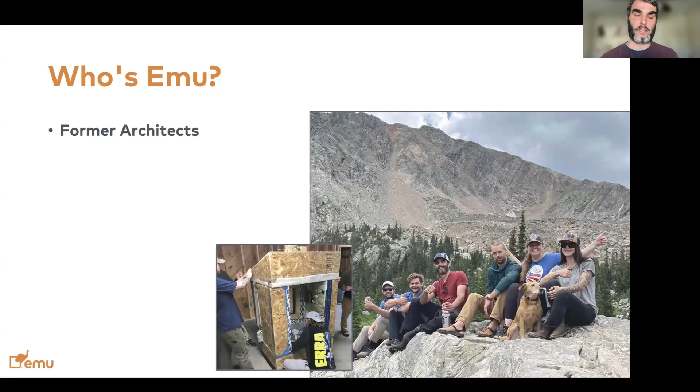So who's Emu? We were architects. Emu was literally founded by Mariana Pickering and I in 2009 as an architectural practice. Over the years, we evolved to providing mostly training. We saw a great opportunity for faster and more impactful change in the market by educating people, more so than working on individual projects one at a time.

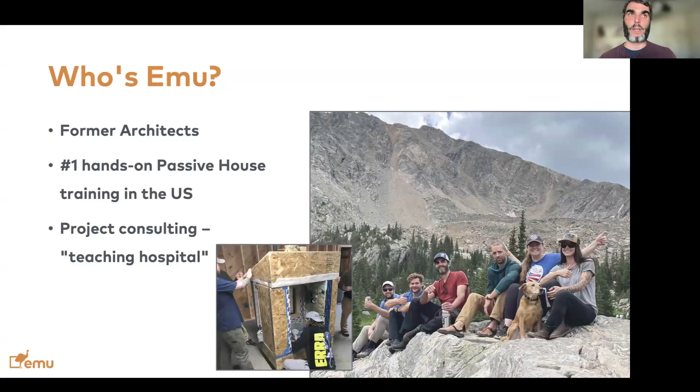We have developed a hands-on workshop that we take around the country. We were in Brooklyn last week, we are going to be in Boston next week. We can talk later about upcoming dates, but it is a lot of what we do. We also do some consulting as a way to keep our curriculum relevant. We see ourselves as a teaching hospital - actual projects are a way for us to be familiar with new products, new challenges, different climate zones, different types of projects. So it's a way that keeps our teaching alive and current.

So what Emu does is actually a lot of training. About two-thirds of what we do is training, and the remaining third is consulting. The training is mostly online. We have the in-person boot camp that is probably what is most visible on social media - if you follow us on Instagram or YouTube, you see a lot of that. But that training is also available online for the course part. Consulting, we do some of that, but it's really to help alumni on their first projects and to keep the curriculum relevant, as I mentioned.

Now, this is who Emu is. I would like you to try and put in the chat who you are. It's always good for me to have an understanding about who I'm talking with, so that when we have the conversation later, it's going to be more fun and more defined.

So please put in the chat - if you are an architect or designer, please type 1. If you are a builder or contractor, please type 2. Type 3 if you work in construction with some specialty, for example if you're an engineer, an HVAC installer, or if you rep or install windows, things like that. Type 4 if you work in permitting, inspections, or testing - we don't get many of those, so I hope we have some in the crowd today.

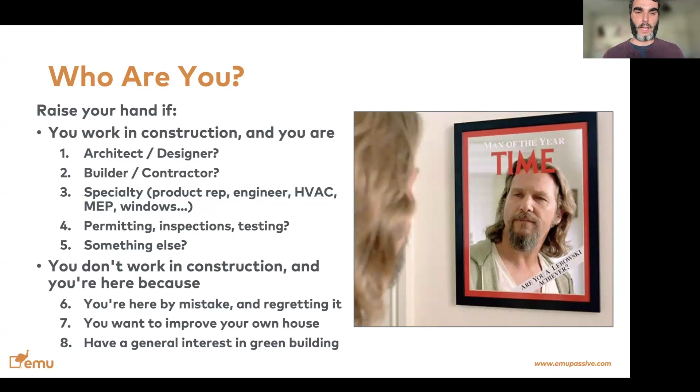Or something else, but you're still a professional. And if you're not a professional working in construction, then if you're here by mistake and regretting it, type 6 - you're still in time to leave. If you just want to improve your own house, type 7. Or if you're just interested in green building, please type 8. This is kind of helpful to get a sense of what audience we have today. Please type your number as you go in.

Now, why do we care about buildings? This is something that when we teach our builders and our architects, we always try to go back to the why. Because if we understand the why, then we have a good sense of how to move forward.

A lot of people that come and take our training or that we help with their projects via consulting, they don't necessarily want to certify the buildings. They want to build better and use passive house science to get there, to have more resilient buildings, healthier buildings with higher comfort and higher indoor air quality, as well as goals to get to net zero and significantly reduce their energy impact on the planet. So that is why they come to us, but they really don't always come to us just to get a plaque or certification.

So we spend a lot of time inside buildings. Do you know how long we spend inside our buildings? Can you please type in the chat what percentage of time we spend inside buildings?

Let me see the chat. This is intended to be a little bit interactive. Oh, 90%, 90%, okay good. A lot of you have done your study. Very good.

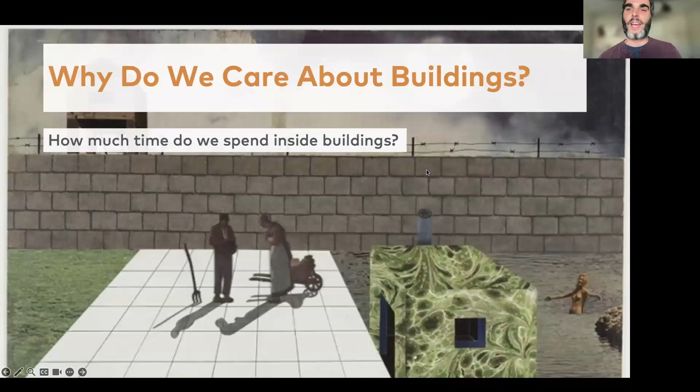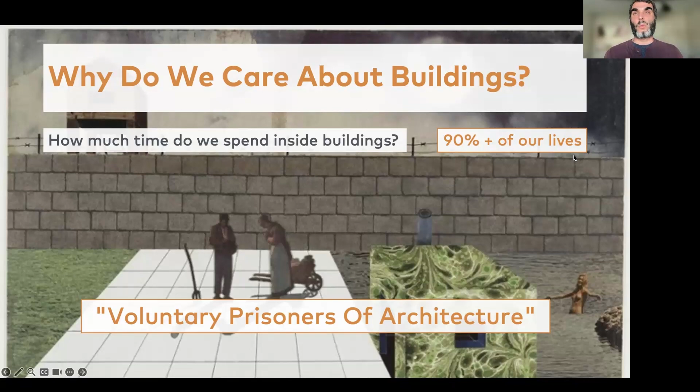There's an architect from the Netherlands, Rem Koolhaas, who had this concept of voluntary prisoners of architecture. We people, there is no law that forces us to be inside our homes. Yes, there are people in jail, but that's different. Most of us decide to be inside the building because we get shelter, we get protection, but we are voluntarily doing so. There's no requirement for us to do that. So these are some examples of buildings.

This is a brewery in Colorado. That is my beer glass. And I was so uncomfortable, it was so cold that I only had one beer instead of a couple. And they literally lost business because the place was so uncomfortable.

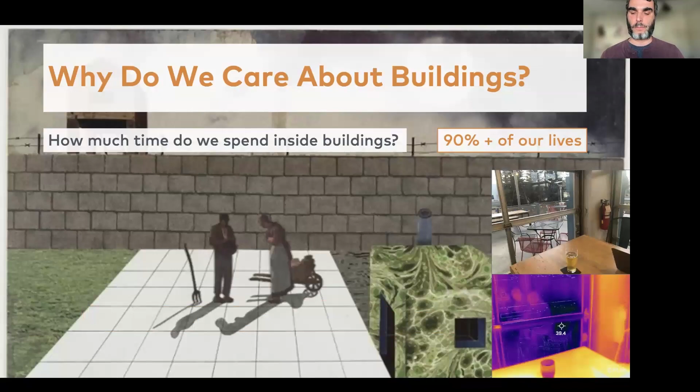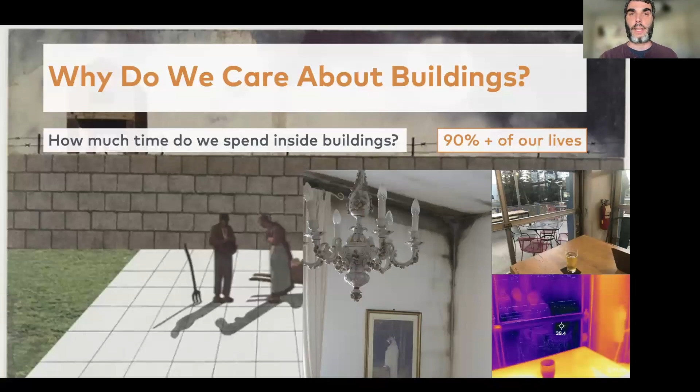And this is one of the risks that we face in pushing the envelope without really knowing what we're doing for the building science. This on the left-hand side kind of ties to the conversation we were having before the presentation started about monitoring CO2 and indoor air quality.

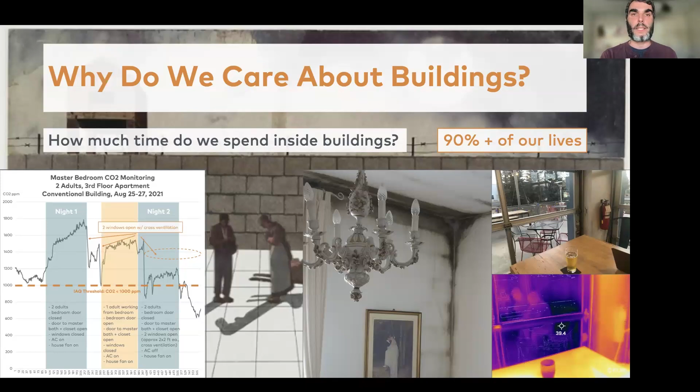This is an apartment I used to live in in Colorado, a building that is less than 10 years old and has no continuous ventilation. In the shoulder seasons, in the spring - this is actually in the summertime - I was basically fighting the need for fresh air and to keep my CO2 low with the intention to be comfortable. It was basically impossible to do because the building was not set up to have indoor air quality. So that is a building that complies with the latest energy code, but does not have a way to control indoor air quality, which is very important.

So another question for you all, please type in the chat. This is something that I ask all the time. If you've seen me present in the past, you probably know the answer to this. How long does a family stay in a house they just moved into before they move out again?

I see a 6, I see a 10, 5 to 7, 4, 13, 13, 7, 7. So this is awesome, we have all numbers in the spectrum. We have 7, we have 25, we have 5. Years are just numbers, I heard once, which is fun, but it was a different context.

How long have you lived in the house you live in right now? 10, 32. Okay, pretty high numbers there.

So this is very important because as we make recommendations to our clients, as we make decisions to invest in a building that is built better and is more resilient, we're going to be asked about what is the return on investment of this greater investment, what is the energy savings and all of that.

And if we don't have the frame of reference for the time clear, then we are giving ill advice to our clients. The national statistic, which has nothing to do with passive house, provided by NAHB, the National Association of Home Builders, is that on average families stay in homes for 13 years before they move out again. And this statistic is over 10 years old. So for the past 10 years continuously it has been 13 years. And the number is increasing, so people are staying longer. There was COVID, there are higher interest rates, it becomes a lot more expensive to build. So people spend a lot more time in buildings than we may believe.

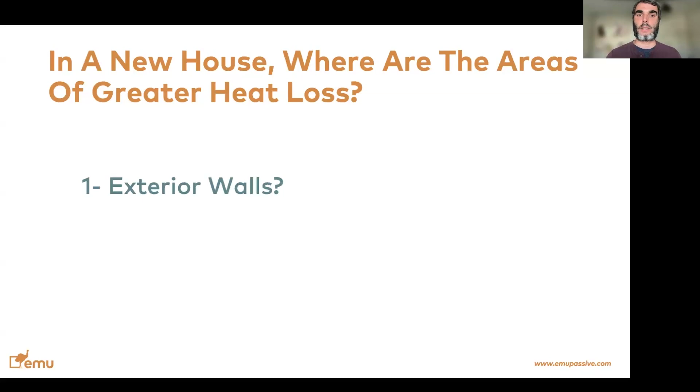So looking at how we can make a building more energy efficient, in a brand new house built to the latest energy code, where are the areas of the greatest heat loss? Is it the exterior walls? Is it the ceiling or the roof? The air leakage? Is it the windows, exterior doors, the doggy door? Or is it the slab, or losses through the ground? Please type in the numbers that you believe that to be.

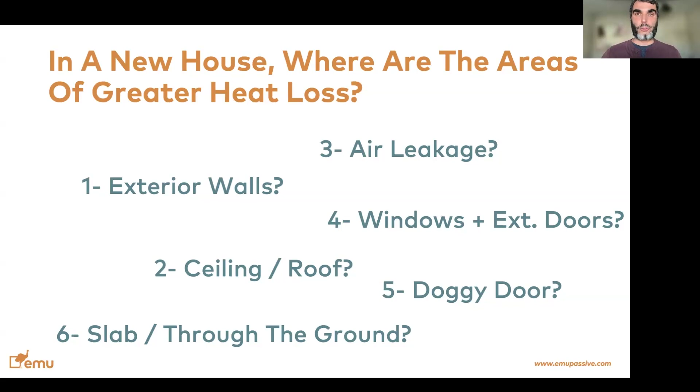I see air leakage, I see slab, I see a lot of air leakage, I see a lot of windows. Air leakage, excellent. And I didn't know that, so I included this in part of a study that we published last year, because we ourselves, we call EMU, we curate our own curriculum, and people were asking, and clearly this changes depending on different climate zones and different types of buildings, if it is a retrofit, if it is a commercial building and whatnot. But I had no idea.

So this is part of this study that we published last year with 50 different projects, single family home, new construction, where we compared different building standards. And we found that this was the typical breakdown of the heat losses over those projects. Now, those projects were intentionally selected to be in different climate zones. They are all new construction. And if we apply the 2021 IECC energy code, then this is the breakdown that we will find on average in those projects.

In other words, number one, windows and exterior doors. That does not include air leaks. Air leaks are lumped up in the air leaks in the blue here. Number two is exterior walls. Number three is heat losses through the slab or through the walls, through ground, to the outside air. And only number four from the top is the air leaks that count for the heat losses in these new buildings. Yeah, I see that it's very hard to read.

I'm sorry about that. Maybe I can provide the PDFs after this presentation. But long story short, on average, you can expect the greatest area of heat losses in a new house to be windows. The second one, the exterior walls. And the third one to be the floor or the slab on grade, heat losses through the ground to the outside. And the air leaks is only the fourth one.

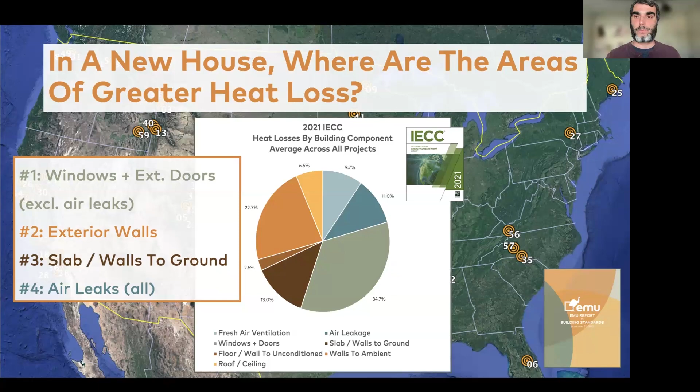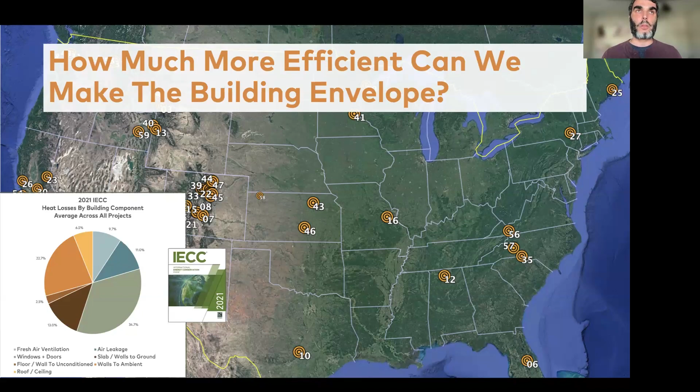So this was one of the surprises that we had as we were processing the data from these 50 different projects. Now, something that I found to be interesting is that was for the 2021 energy code. What about passive house? So we modeled, as part of this study, also for all these 50 projects, if they were to meet the PHI passive house, and this is what the breakdown would look like. So it's actually a very similar breakdown.

Windows are still the number one cause of heat losses. And the second one is still the exterior walls. And the third one is still the heat losses through the ground. So the difference is that using passive house, we significantly reduce those losses. But the kind of breakdown or the hierarchy remains kind of the same. Number one, windows. Number two, walls. Number three, losses through the ground to the outside.

And that's why we're going to have a couple of examples of that today. And the losses through air leakage is something that is very talked about. It's very present on social media because it's very important for the durability of the building, for buildings to be airtight. But in terms of the overall weight of the losses through air leakage, we're talking 10%. We're not talking 50%. I heard builders say, oh, I saw on Instagram that air leaks count for 50% of the heat losses. And that may be true for old buildings that were not retrofitted, where you have a ton of air leakage. But if you start looking at buildings that have 3 ACH or air leakage or tighter, then those losses through air leakage is just 10% or less of the total.

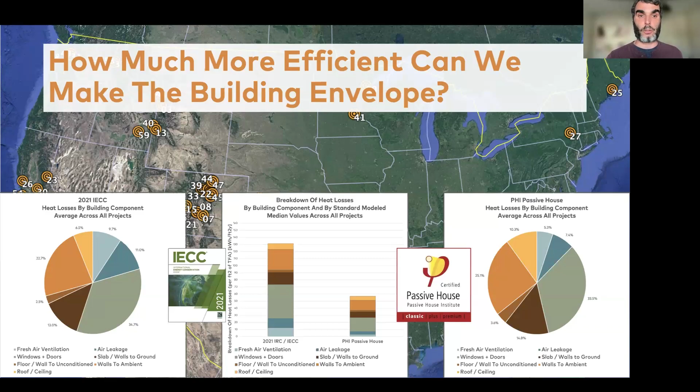So let's start talking about windows. This is the first in our lineup. And why do we care about windows? I mentioned that I was so uncomfortable at this bar in Colorado that I had to leave. And this is something that is extremely common, not just in breweries, but everywhere. In fact, there is no requirement in the regular building code to provide thermal comfort. That is something that Passive House does include as part of the certification requirements, as opposed to building code and other building codes like Energy Star or the Zero Energy Ready Homes. They don't really address thermal comfort.

Colorado was the first place I lived where I had ice forming on the inside of my window. This was during COVID, 2020-2021, and I had not much to do, so I posted a picture of this on social media, including LinkedIn. We work with a lot of window manufacturers, so I have many connections in the fenestration and window manufacturing industry. I got so much pushback because I posted this picture. To the American window and door manufacturing industry, it is accepted and considered normal to have ice forming on the inside of the window. I did not have a humidifier, it was just a cold day outside. I had ice forming on the inside of my window with no humidifier, and that is accepted as normal and standard for American-made windows. That is very sad.

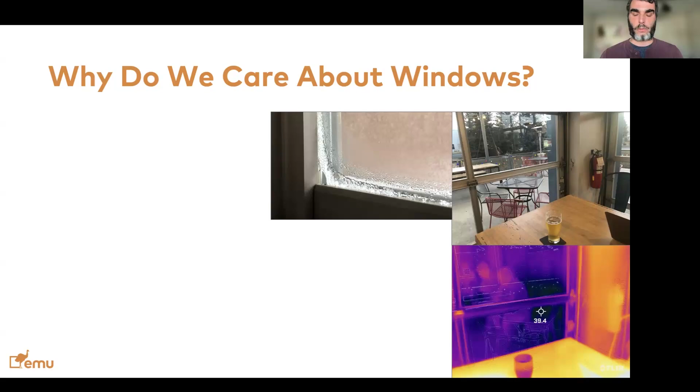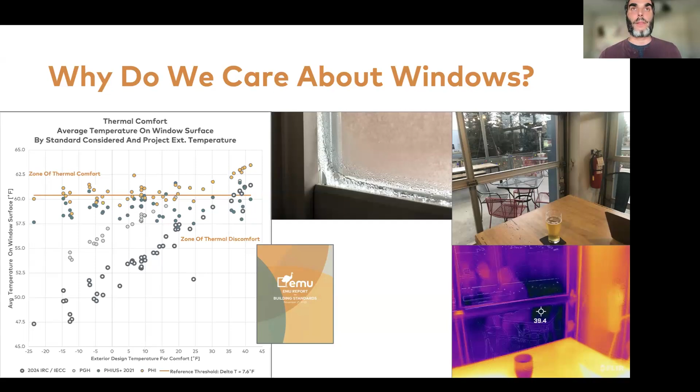Just to give you context of what is out there, this is another analysis from the same study going over 50 different projects, where each dot is one project and the color shows which building standard we were considering. There's a free download at the end of this study if you're interested. This graph shows that PHIUS and PHI follow the thermal comfort analysis, as opposed to building code, which has no relationship between the requirements and thermal comfort. We care about windows because they are cornerstones of our buildings being comfortable and free of ice, mold, and condensation. That is why we care about windows.

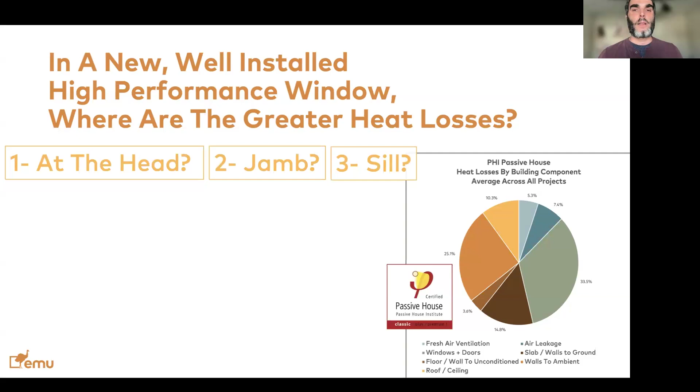Now, in a new, well-installed, high-performance window, where do you believe the greatest heat losses occur? Type in the chat - do you expect losses to be at the head, the jamb, the sill, the glass edge, the window frame, or through air leaks? New window, well installed, high performance - where do you see the greatest losses?

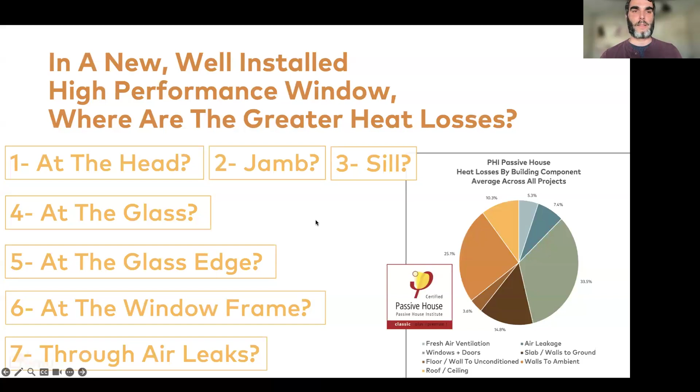I see some saying air leaks, some saying window frame. Very good, very good. Glass edge, okay cool. Thank you for participating.

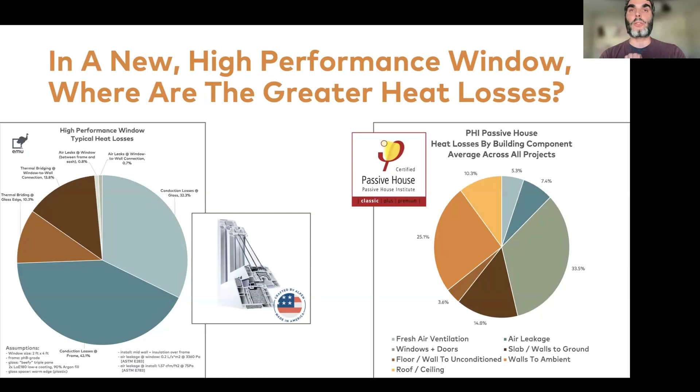Let me jump ahead a little bit. Number one is conduction losses through the window frame. Number two, in lighter blue, is losses through the glass. Number three is the thermal bridge at the window-to-wall connection - we're going to see in a second what that is. The fourth is the glass edge thermal bridge. Last come the air leaks at the connection between the sash and frame, and the window-to-wall connection. These are data we got from lab testing and field testing from Alpen.

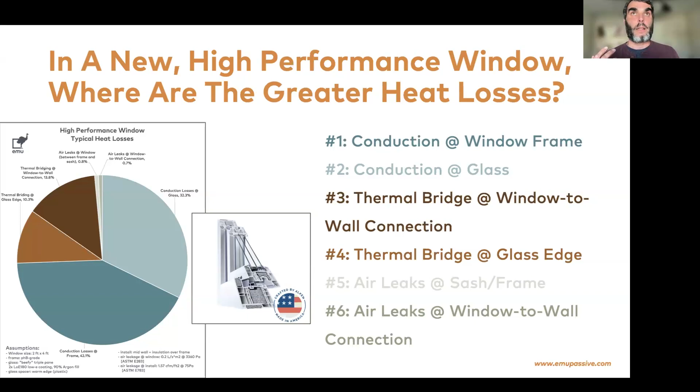A lot of builders who come to our training know that windows are going to leak at some point, but really the air leakage is a very small fraction of the losses through a window - it's like 1% or 2%. Majority of the loss, once we switch to a high performance window with triple pane, then the frame becomes extremely important.

Then there's the glass edge thermal bridge, which is number 4. Only number 5 and 6 are the air leaks between the sash and the frame of the window itself and at the installation of the window, assuming this is a well-installed window. So in the context of windows being the biggest cause of heat losses, within a window, air leaks are actually very small, assuming it's a good window that is installed well.

That's why we train builders to do that. But it's extremely important to choose a good frame and a good glass, because otherwise you may have a very well-installed but very poor window. And that will still get you uncomfortable with ice and condensation, because a lot of the losses are through conduction, not through air leaks.

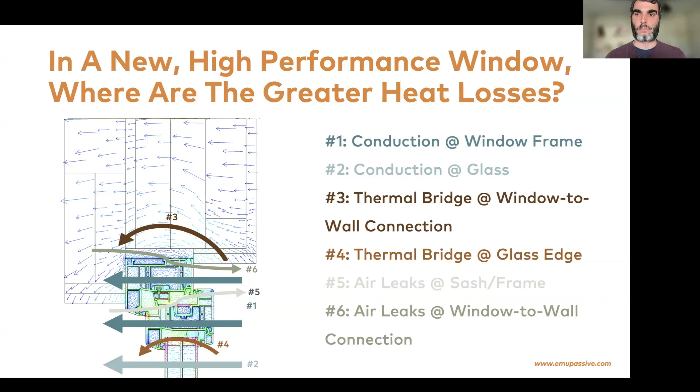The next one up, and we saw that in the pie chart for the heat losses, is heat losses through the ground. This is something that blows builders' minds when we mention it, because there is a belief that the ground is at a constant temperature, so it kind of does not matter. It is all the opposite. It does matter a lot. It is the third greatest area of heat loss in a typical new construction.

Somebody says we cannot see the new slide. Can you see the new slide now? Can you see a blank slide? Okay, cool, thank you for that.

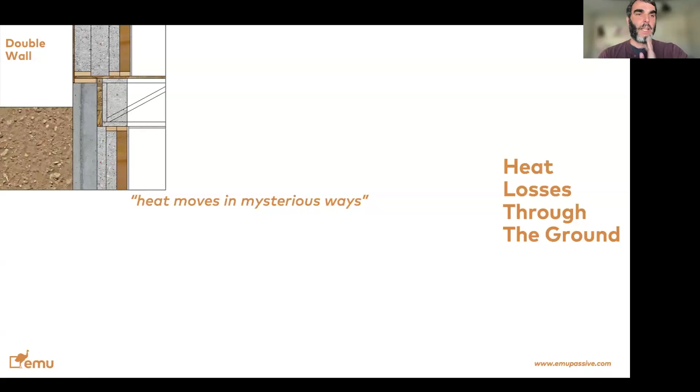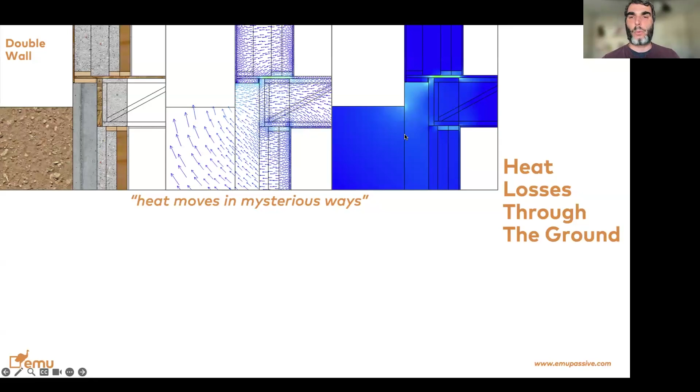So this is a typical construction detail where you have your losses. This is what the flux diagram shows, and you can see there's a lot of arrows that go from downstairs through the ground up to the outside. In this case, it's not a big deal. We have enough insulation through the floor to not cause any issues.

This is a case of a double wall, and these details vary significantly in what strategy we need to implement depending on what kind of assemblies we are trying to connect. Now, if we do the same exact detail, but with a 2x6 wall with exterior insulation, it looks like this. This is something we created for our textbook. The one above is from an actual project. We wanted to replicate the same and show some issues with the different types of assemblies.

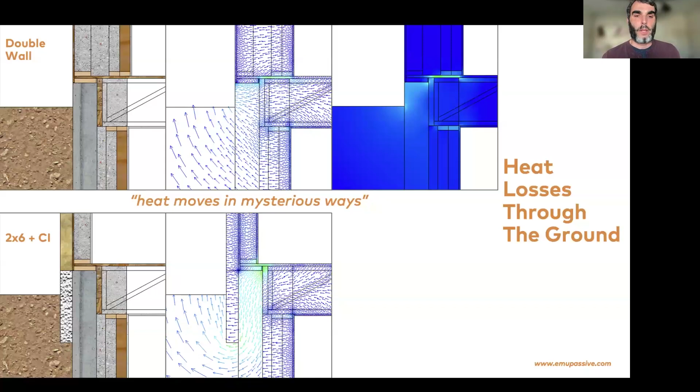So the one below is a 2x6 wall that has continuous insulation. One may think, oh, my insulation goes one or two feet down into the below grade, and I may be good enough. The reality is that heat is very good at finding ways to escape, and heat moves in all 3 directions. So this is an example where we have a very big thermal bridge because there was no insulation under the wall plate.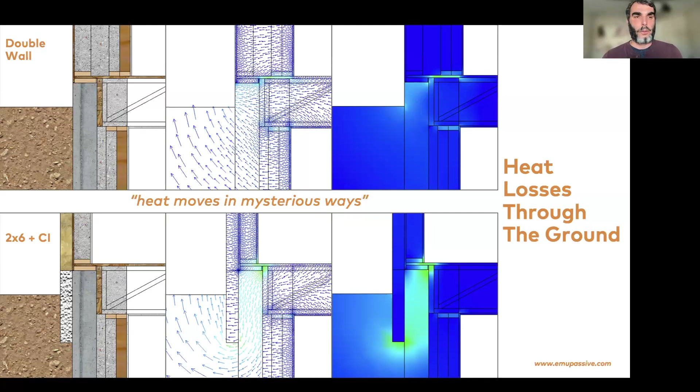So the detail above with the double stud wall, great, no problem. The one below, it does need some work because we have a lot of thermal bridging. This is where believing that the ground is at a constant temperature and it kind of does not matter, you don't have to insulate, may lead the project to have issues, because heat is very good at finding the easiest way out. Now, to expand on that, we have one more example for the heat losses to the ground.

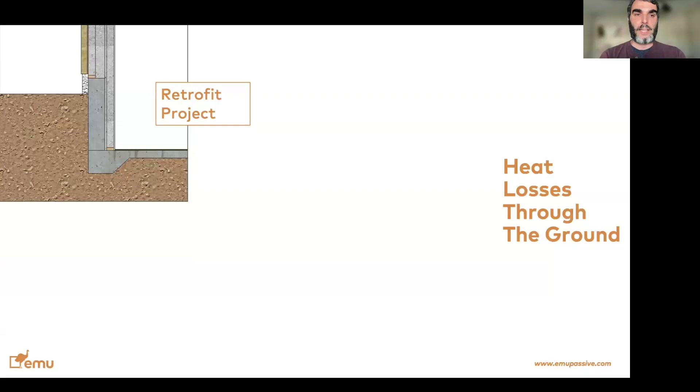This one is from a retrofit of a project in Montana. Detail of an existing floor that was kind of sunk into the dirt, and they have an existing slab, and they have the exterior wall. They put extra effort into having a double stud wall for the wall above grade, and they also added exterior insulation. As opposed to the slab, they were planning on not doing anything because they assumed that the ground is at a constant temperature, so it doesn't matter.

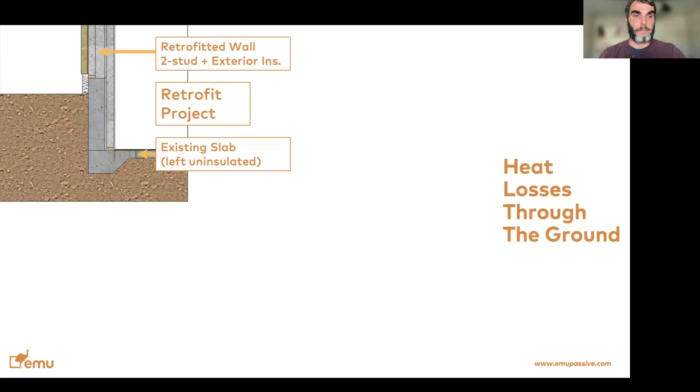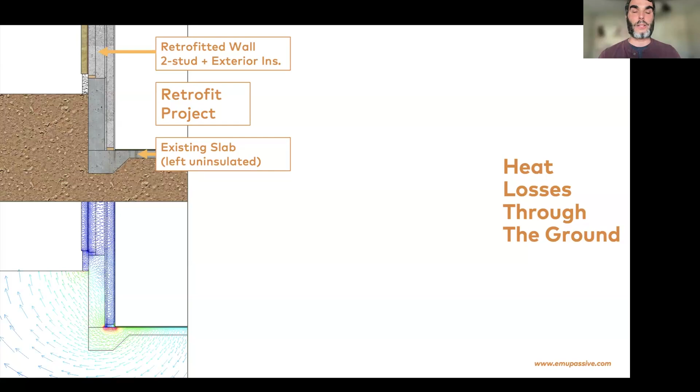But once you actually do the analysis, this is what the heat flow looks like. Blue in the analysis means not much heat flow. So the wall is a double stud wall, has exterior insulation, it's awesome, super performing. The slab has zero insulation, and so that becomes a highway for the heat to escape to the outside. And this heat flow is not just at the perimeter, it's under the entire building.

Because it's not that you're losing heat to the dirt and then you're warming up Mother Earth. The heat escapes through the dirt and it goes to warm up the exterior air. So that is very important to see, and that is something that blows the mind of a lot of builders we work with.

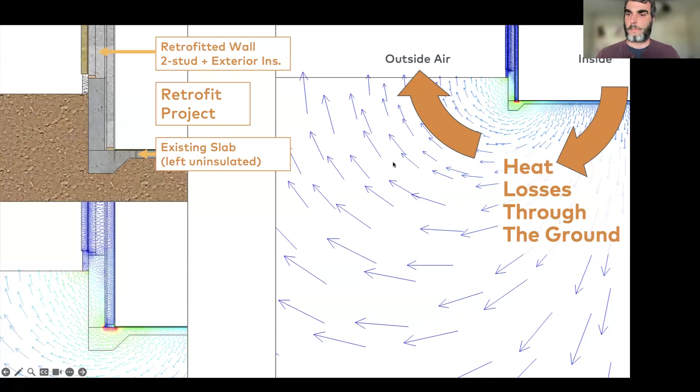So what we're talking about here are two exterior walls. On the left-hand side, those are two identical walls, where the pink is the stud cavity, your 2x6 space with insulation. The orange is your sheathing, the greenish is your exterior insulation, and the L-shaped lip is a 24-gauge aluminum flashing, very typical in what's called high-performance construction.

That is not really high performance. On Instagram, if you look at flashing details, you'll see a lot of that. And that's often a problem because in a home project, you may easily have 300 linear feet of this detail. So the impact is very large.

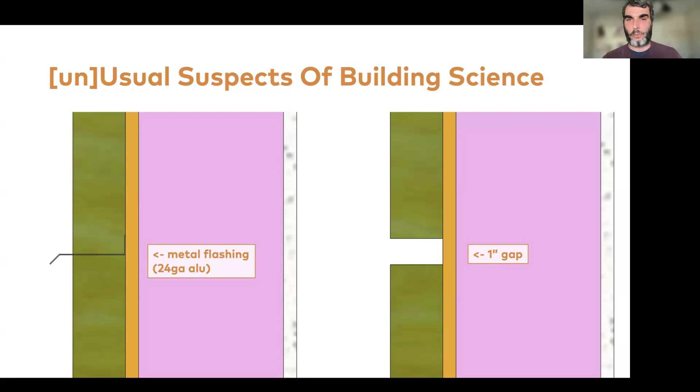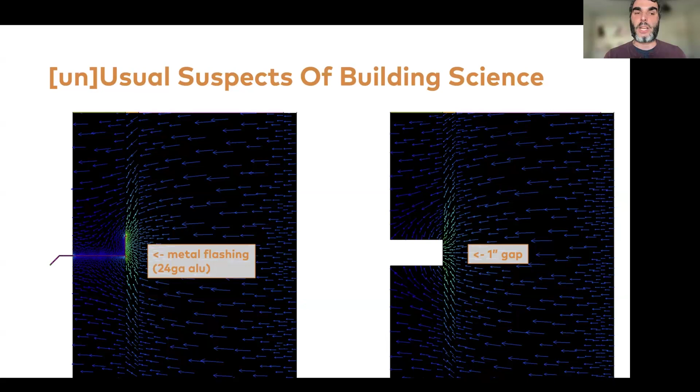On the right-hand side, we modeled just leaving a gap in the insulation, a 1-inch gap between your insulation boards. What we found is that they actually act very similar - that metal fin on the left-hand side really sucks the heat from the sheathing and dumps it to the outside. If you look at the isotherms, they look very similar. In fact, performance-wise, having a metal flashing element penetrating through your insulation has about the same thermal bridging effect as leaving a 1-inch gap in your insulation.

Now, you would not leave an inch gap in your insulation, so you should also look at non-metal flashing details for your project. Flashing is extremely important, but today there's so much good technology to do these details and avoid using metal. This is extremely important - these are small details, but flashing, you may have 200 or 300 linear feet of that detail in your project. So it's extremely important, and I hope you cannot unsee this, because it's literally like leaving an inch gap between your insulation boards.

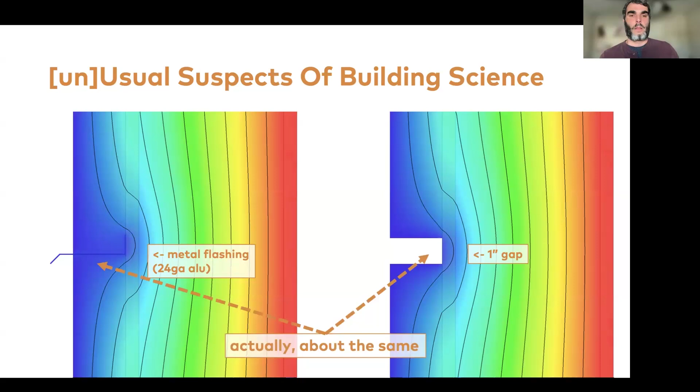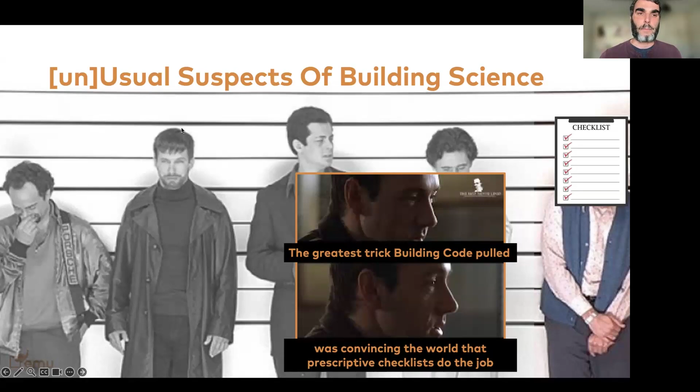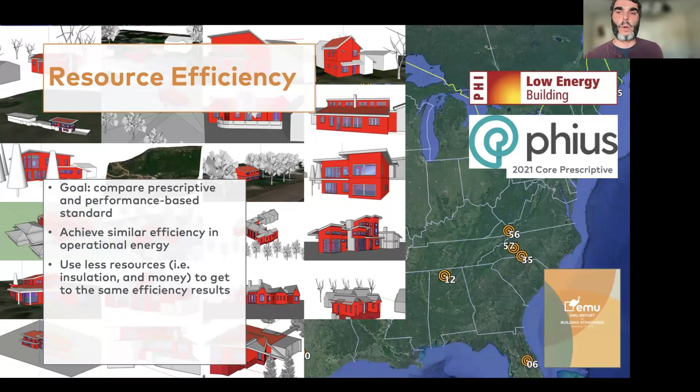This is a greater picture view of how we approach building science. Part of the study I mentioned earlier, we compared different building standards, but we also did little side projects. Part of that, we compared two standards: one performance-based, in this case low energy building by PHI, versus a prescriptive one, in this case by Phius. We picked those because they were kind of close to each other in the energy performance the buildings would get implementing these standards.

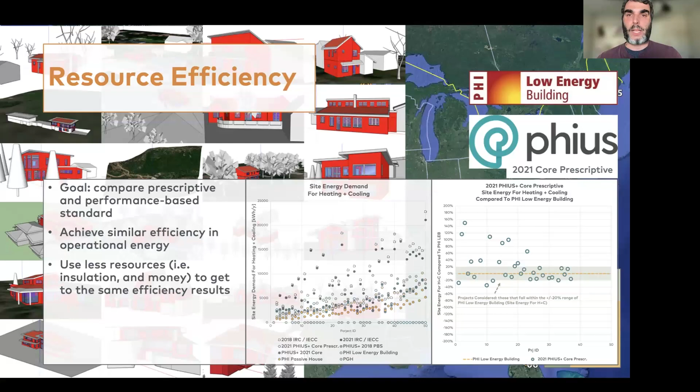So we selected these two standards. We chose projects - out of the 50 projects we covered in the report - we chose the ones that fell within 20% of each other in terms of performance. We ended up with 18 projects that met this criteria.

And what we found is - these are 18 projects that get to the same energy performance using the performance-based approach, PHI low energy building, and the prescriptive approach, Phius prescriptive. Now, a pushback we get from builders is that for the performance-based approach, someone has to do the energy analysis, and that's perceived as an extra cost.

Now, if you're trying to be more resource efficient, you want to look at how your building performs, as well as what you need for that performance to happen. For these 18 projects, we saw on average that the performance-based projects needed 800 cubic feet less insulation to get to the same energy performance. I'll say that one more time: the projects using the performance-based approach, because they were able to tweak the passive solar gains and other parameters of the envelope, used 800 cubic feet less thermal insulation on average to get to the same energy performance than the projects using the prescriptive approach.

It's a ton of insulation. It's a truckload of insulation. If you're trying to be resource efficient, if you're trying to minimize embodied carbon, if you're trying to be cost efficient, 800 cubic feet of insulation is a lot of money.

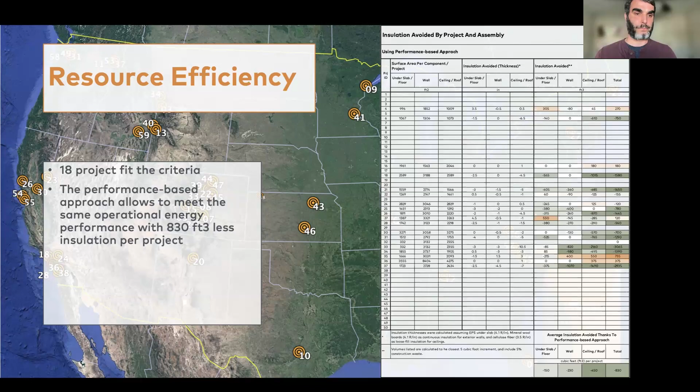So this was one of the results that we found. Looking at the cost analysis, we factored in what we charged those projects for those analyses. On average, once you account for the insulation that was not used, so saved, projects using the performance-based path were saving on average $5,000, even when we accounted for what we charged.

In other words, in my opinion, we need a systemic change of approach to high-performance buildings where we move away from prescriptive approaches and start implementing a performance-based approach, whichever the goal. I'm not saying every single project has to meet passive house, but we want to be smart about it, because there are so many factors to bring in: embodied carbon, resiliency, comfort, condensation avoidance, all of that. And a prescriptive checklist just does not do the job.

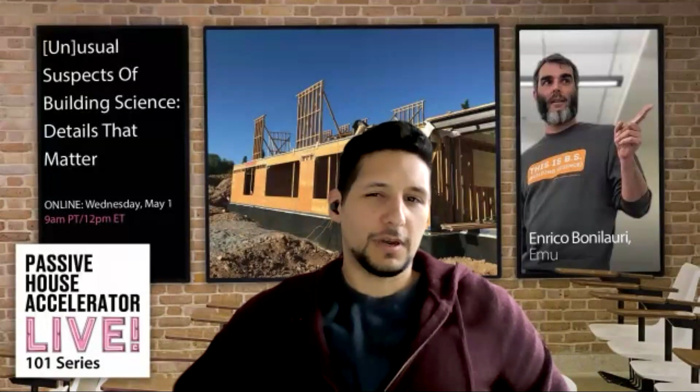I have one more comment to put it in perspective for everyone. Enrico, since we've been discussing solar heat gain coefficients and gains, everything you said is spot on. I'm just wondering, where would you place this in terms of priority when you're designing the building? Would you leave this for the end to do micro adjustments on the model, or would you put this at the beginning of the whole design to try to drive it?

That's a great question. It comes down to which goals the project has, because if you want to be Passive House certified, you want to have this analysis done at the schematic design stage, because that is where you translate goals or ideas into budget items and priorities. So schematic design is where this analysis is best done.

As far as priorities, number one is air sealing and continuous filtered ventilation, so your air seal and your ERV. Priority number two, in my opinion, goes to windows, because that drives a lot of the comfort and condensation avoidance in your project. Then the R values or insulation package is a lower priority that really depends on the goals of a project as well as the budget. That is the typical breakdown of priorities we work on projects.